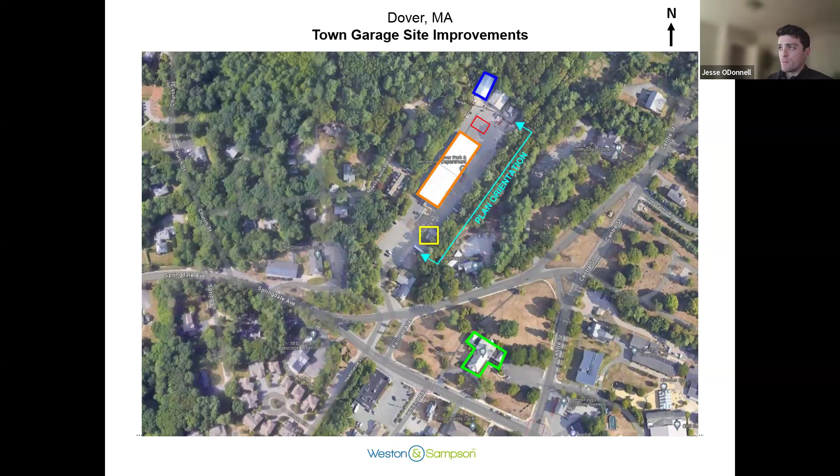I'll flip to the next screen here, so for everyone's reference, we're going to twist to accommodate that axis. Let's zoom into the rear portion of the site where the red rectangle is and see what the plan looks like. Here's the plan. We have the proposed location of the new fuel system indicated by the red, orange, and blue area on the plan.

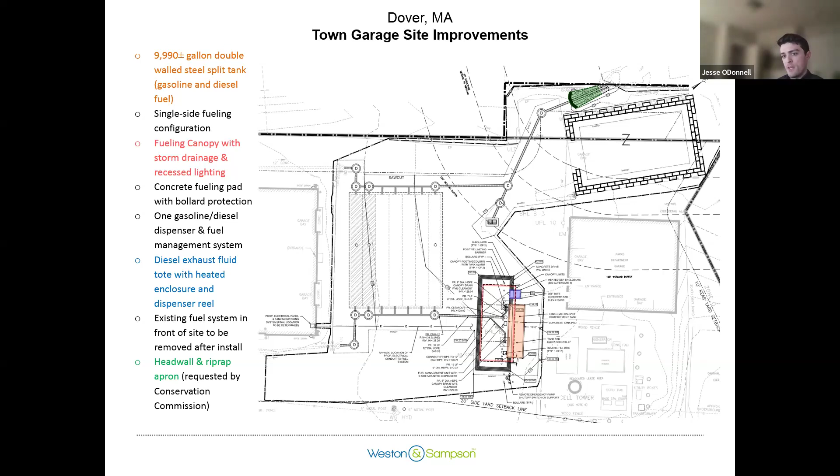In orange is the just under 10,000 gallon double-walled steel split tank. In red is the fueling canopy with associated stormwater piping to connect it to the proposed stormwater system on the site. In blue is the diesel exhaust fluid tote with a heated enclosure and a dispenser reel. We are proposing the existing fuel system in front of the site be removed after installation of the proposed system so there is continuity in service.

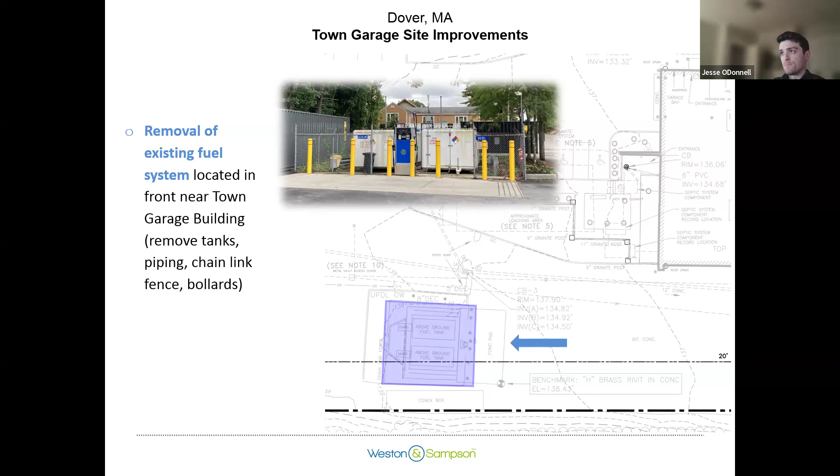With that, I'd like to jump into the siting assessment we underwent with the DPW a year to 2 years ago when we started investigating potential options for this project. The first siting option assessed was just replacing the current fuel system right in place, and for a number of reasons we deemed that unideal or inadequate. First, the current location of the existing fuel tanks requires reverse vehicular maneuvers to access them, whether reversing in or out, which presents at best an inconvenience, but at worst a safety risk and major fuel delivery challenges.

This is mentioned in memos we received from the fire and police chiefs, included with our application. The fire and police chiefs are present tonight and can help answer any questions the board or public may have. Second, this location would interrupt on-site fueling operations, adding cost associated with whatever temporary fueling solution would be found.

Lastly, a portion of the tanks are currently located within an AT&T easement, which prohibits structures, so that's an existing non-conforming condition. A portion of the tanks are also located within the property line structure setback, another existing non-conforming condition. By relocating the tanks outside of this area, we would restore conformity with both conditions. So with all that in mind, we set out to look for a new location for the tanks.

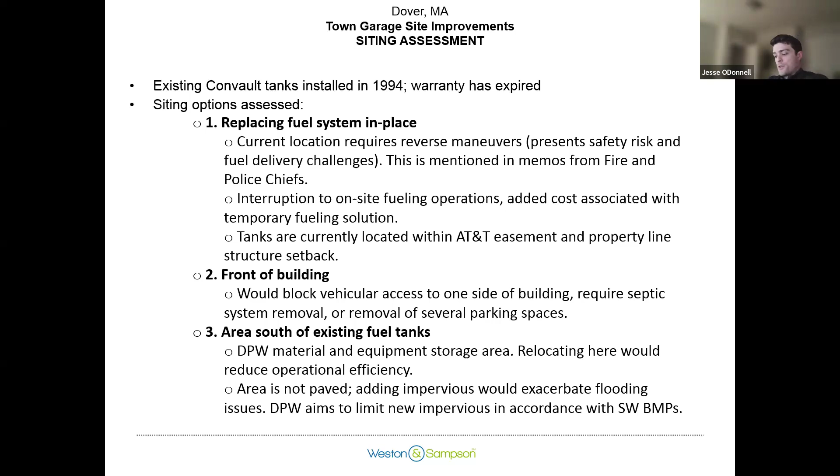Continuing with this location, another con was the 4% slope that exists here. It presents some pad installation and fuel operation challenges. Ideally, a pad would be installed on a slope that's closer to 2% or less. And lastly, this location would require additional geotechnical and environmental exploration, which would not be required in the rear portion of the site because those explorations have already happened. So locating it here would also require an extension in the timeline and additional explorations and costs.

So for all these reasons and the additional benefits I'm about to mention, we selected the rear of the site as the best location for the project.

The fuel tanks conform to zoning and dimensional requirements where they're currently proposed. We already incorporated the Conservation Commission's feedback to their satisfaction. Additionally, this is the best option for vehicular access and circulation, and we can have the police and fire chief speak more to that if needed.

The rear location keeps critical infrastructure away from a public-facing location. The grades in this area are more forgiving, not quite the 4% we saw out front, they are less steep. Lastly, the National Fire Protection Association requires tanks like this one to be offset 15 feet from other buildings and structures. The closest we have is about a 20+ foot offset to, I believe, the Parks and Rec garage, so we're in exceedance of that requirement as well.

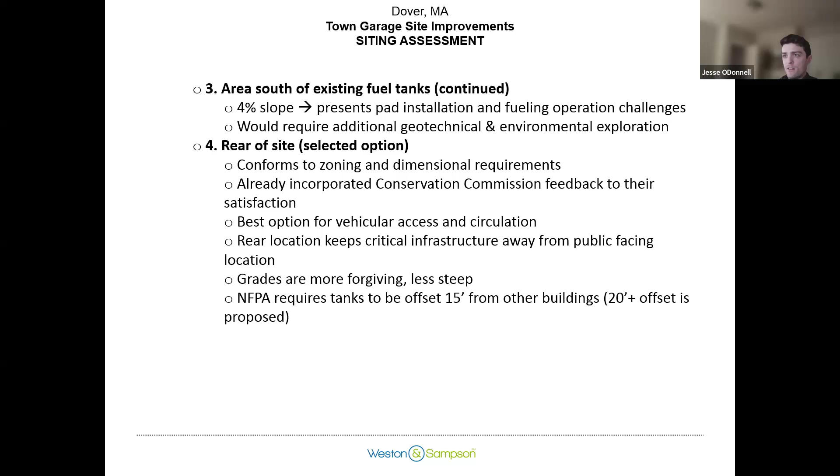So with that in mind, I'd like to pass this along to my colleague Tyler, who can talk a little bit about some of the safety measures associated with the tanks themselves.

Hi everybody, can you all hear me?

Sure can, Tyler. So I know Jesse went through some of the location discussion, but I know there's a lot of concern about the safety around the fuel island. I just wanted to highlight that safety is important to Weston and Sampson and the DPW. We wouldn't be proposing anything that we felt would endanger folks, either the abutters or the DPW personnel using the fuel island.

I just wanted to highlight some of the safety features that went into the design of the fuel island, starting off with the tank that we chose. This isn't your average tank, it's a very highly engineered tank that meets some of the strictest safety requirements in the country, meeting the UL 2085 rating.

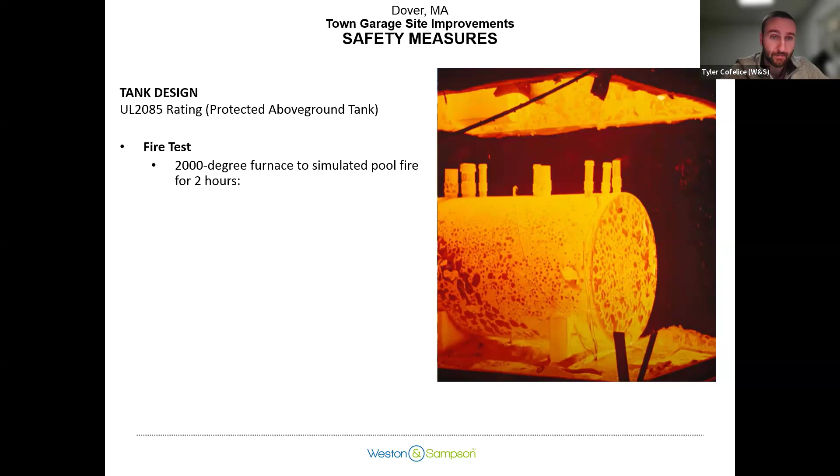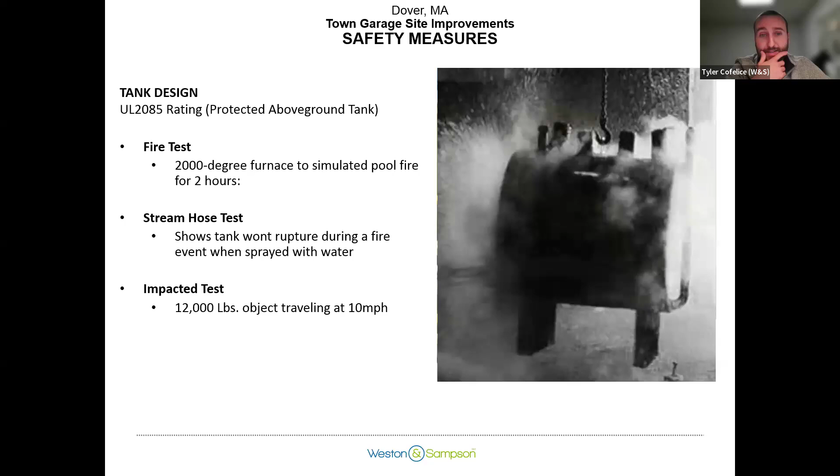Right after that test, they go through a stream test, where they blast the tank with cold water to show it won't rupture when being cooled off after a fire, preventing a release. The next test is an impact test, where you can see a 12,000-pound object being swung into the side of the tank, simulating a vehicular incident to show there would be no rupture to the inner tank. These tanks are considered protected above-ground tanks according to NFPA and meet the vehicular protection requirements all on their own without having bollards.

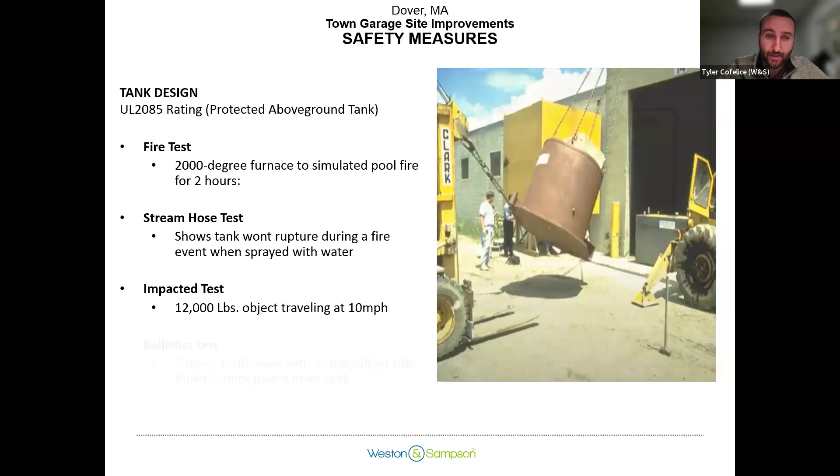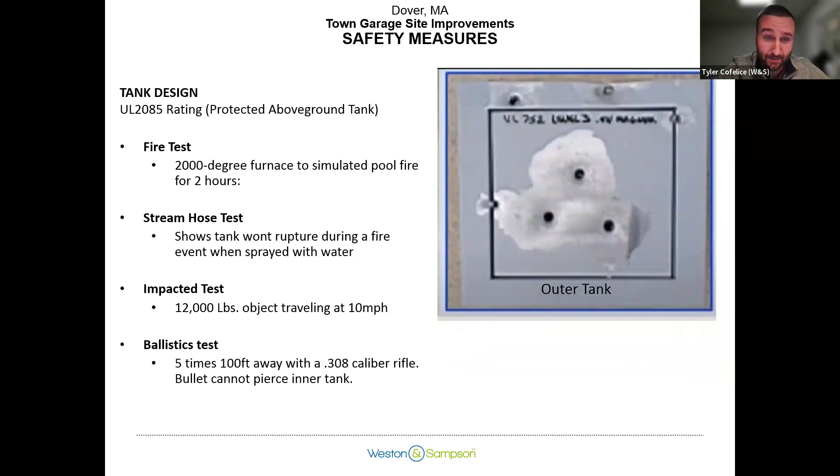We added 6-inch bollards around the tank to provide additional protection. In addition, the tanks have to be ballistic tested. They're shot 5 times from a .308 caliber rifle from 100 feet away, or 33 yards, give or take. You'll see 5 bullets on the outer tank, and it has to not be able to pierce the inner tank. That photo shows an example of what the outer tank would look like. So the tank itself is a very, very engineered safe tank.

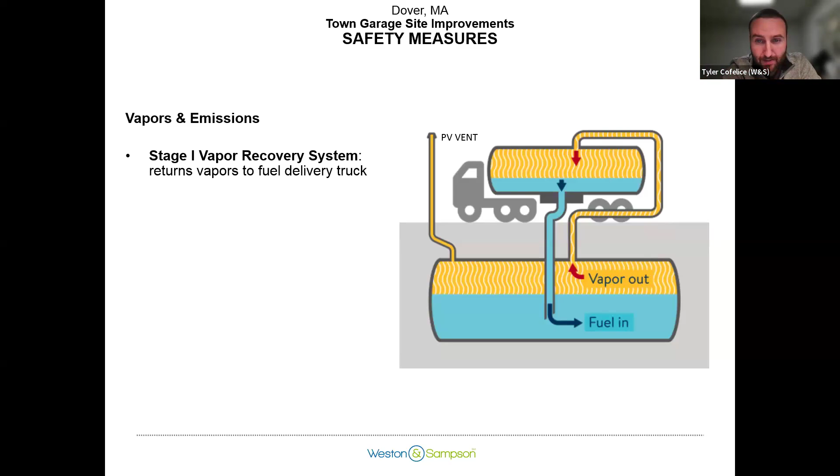The next part of the design I wanted to talk about is the vapors and emissions design built into the system. One of the first is called Stage 1 Vapor Recovery, used to meet National Clean Air Act requirements. Whenever a fuel delivery is brought to the system, a fuel truck pumps fluids into the tank, displacing vapors, and we have to add a pipe that displaces the vapors right back into the truck to prevent them from emitting out into the environment and moving off the property.

There's also a vent called a pressure vacuum vent. This is meant to shut the vent off at all times, except when the tank has to depressurize, like say it's really hot out and the tank gets heated up, the pressure has to be released. So it'll just let it depressurize a little bit and then close again.

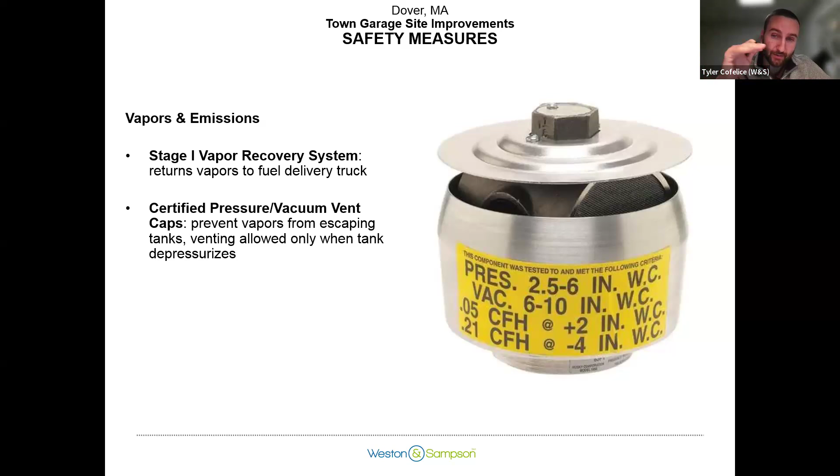The next feature that deals with vapors is an onboard refueling vapor recovery system, which has been designed in vehicles since 1998. This does a similar thing as the Stage 1 vapor recovery. When you're filling up your tank in your car, it forces the vapors to a canister that captures the vapors and prevents them from being released

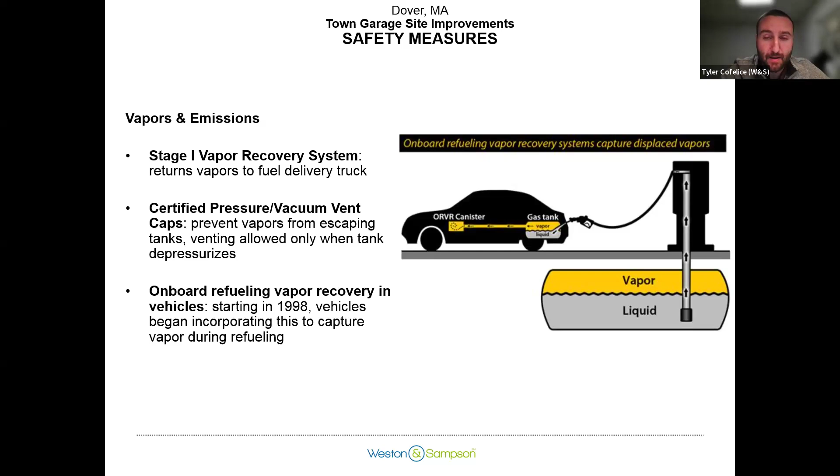Into the environment. These things aren't winning awards for being aesthetical masterpieces, but everything on them is meant for a reason, whether it's safety or function.

Just not to bore everyone, but these tanks are very, very strong. You can shoot them with a gun, you can light them on fire, you can hit them with a car and they won't leak. The only other way we can think of that it could potentially leak is just over time, sometimes water builds up in these tanks and they can corrode the inner tank, in which case they would leak.

They would leak into the interstitial space, which is continuously monitored by an electronic leak monitoring system. That will set off an alarm. It will also automatically notify personnel with emails of such an event.

We also have overfill prevention valves, which is a float in the fill that will, when the tank reaches 95% full, shut off the valve, preventing more fluid from going into the tank. There's also an audible visual alarm that goes off at 90% to notify the fuel tank delivery truck, as well as the DPW personnel present, that the tank needs to shut off the fill.

We also have inline detection, which means if the pump detects a scenario of pressure loss that's inconsistent with a delivery scenario, it will automatically shut it off. Every segment of the fuel piping line that can be shut off with valves has built-in pressure relief, so that if it's baking in the sun all day, the pipes can be depressurized by letting fluid back from the pipes into the tank, preventing a rupture.

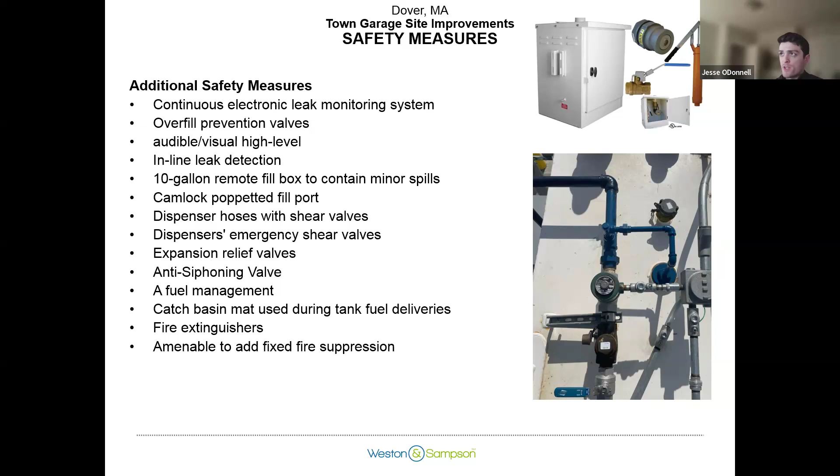That was very informative and I really appreciate the detail. Thank you. So I'm going to open this up first to planning board members for any questions and comments they may have for Jesse or Tyler, and then I will open it up to the resident attendees. So Jody or George, do you have any questions for Tyler or Jesse? I have no questions, but I really want to say thank you for that presentation because that was extremely helpful.

Yeah, I agree. I thought that was helpful given the conversations that have happened here over the course of this process.

Just as a bit of an addendum, I'm sure you may not have this in front of you, but I'm curious if you have any information or data on any incidents relating to these tanks in the last several years. Do you have anything like that you could share?

I don't have any statistics off the top of my head. I've been working with Weston & Sampson for 10 years installing similar fuel islands, and I've personally not heard of any issues from the fuel islands I've worked on, and I've done a lot of them. Okay, thank you.

Okay, as I mentioned in my opening remarks, we'll now open it up for any new information or content. Nicole, are you here this evening? Is Nicole Safarian here? I think so. It just says Nicole, but I think that's her.

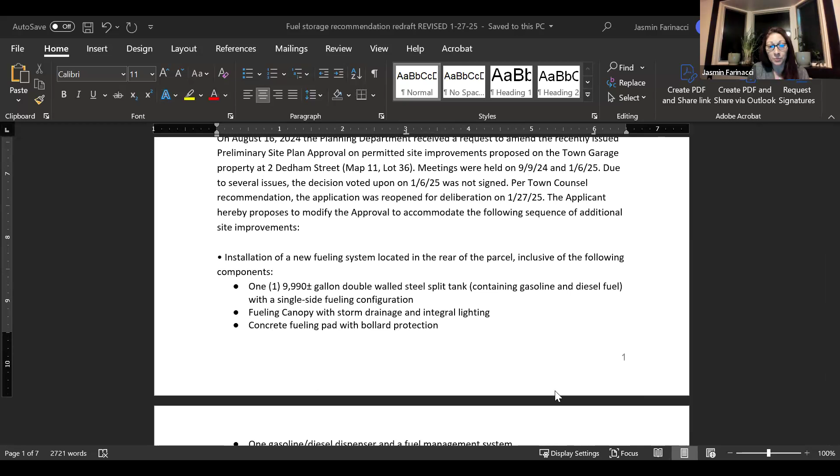To review, it was an installation of a new fuel system located in the rear of the parcel with one 9,990 gallon double wall steel split tank, a fueling canopy, concrete fueling pad, a single gasoline diesel dispenser, a diesel exhaust fluid tote with heated enclosure, and other miscellaneous components to support the fuel island, along with removal of the existing fuel system located proximate to the town entrance. The new fuel system would allow for the removal of the aging double-walled Convault fuel tanks, which were installed in 1994. Their 30-year warranty would be expiring in 2024, or did expire in 2024.

The proposed location for the new fuel island is depicted on the plans by Weston and Sampson, revised through October 21st, 2024. This location was selected to promote more efficient fueling operation for town vehicles. The position of the existing fuel system frequently requires vehicles to reverse before or after fueling and makes fuel delivery challenging. Additional improvements enabled by the new fuel system include a proposed canopy with under-canopy motion sensor lighting. The new fuel system would be classified as a fleet vehicle motor fuel dispensing facility.

Therefore, fire suppression for the fuel island is not required by the Massachusetts Code, as confirmed by Ed Cornack of the fire department. The proposed modifications are located outside of the 100-foot buffer zone to the nearby isolated wetland, which was delineated by Weston and Sampson on October 12, 2023, and is not within the Conservation Commission's jurisdiction. The proposed modifications result in no net increase in impervious surface on the site.

Pursuant to section 18540C of the Dover zoning bylaws, no application for a building permit shall be made for any structure in the open space district until site plans have been submitted to the Board of Selectmen for review, comments, and recommendations. Therefore, approval from the Board of Selectmen will also be required. The Board of Health, Town Engineer, and Building Department do not have requirements for this amendment. The Fire Department requires a permit for the tank's final disposal site when removed, and the name of the contractor handling the disposal. The proposed work is not expected to create any increase in pedestrian, bicycle, or vehicular traffic to or from the site.

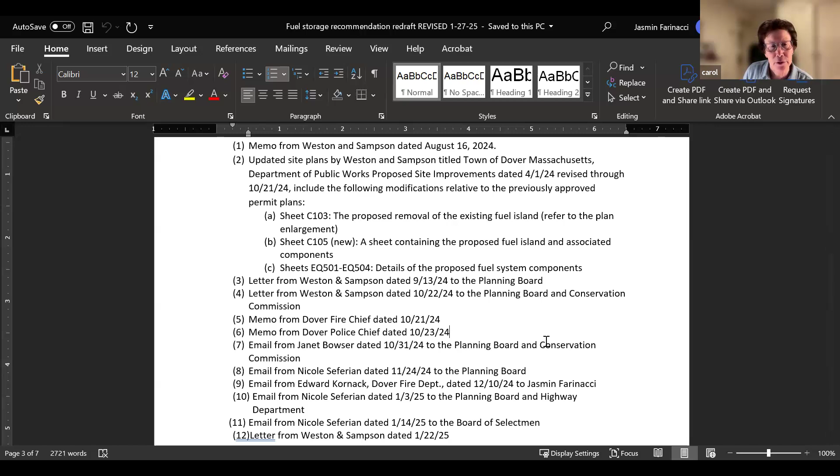So we did break this down. I think this was the first one we did this way, Carol, with the findings that included more of the conversation as well. So we are going to go through the findings of site plan review, and then we're going to go over the findings that were made based on comments that were presented for the project.

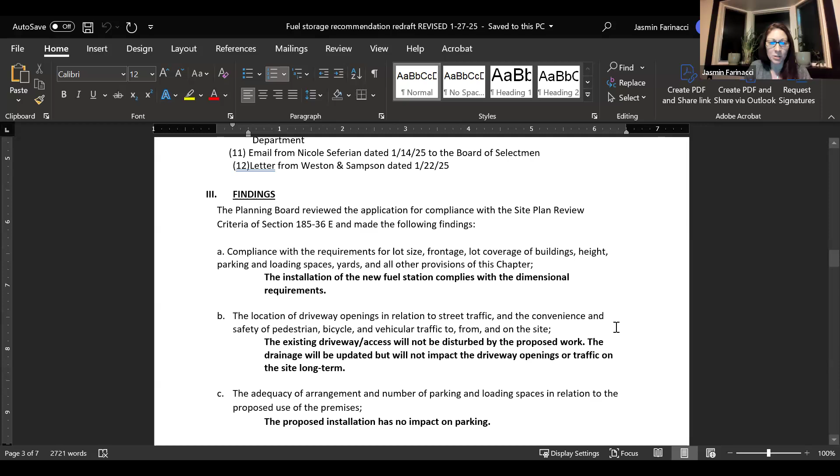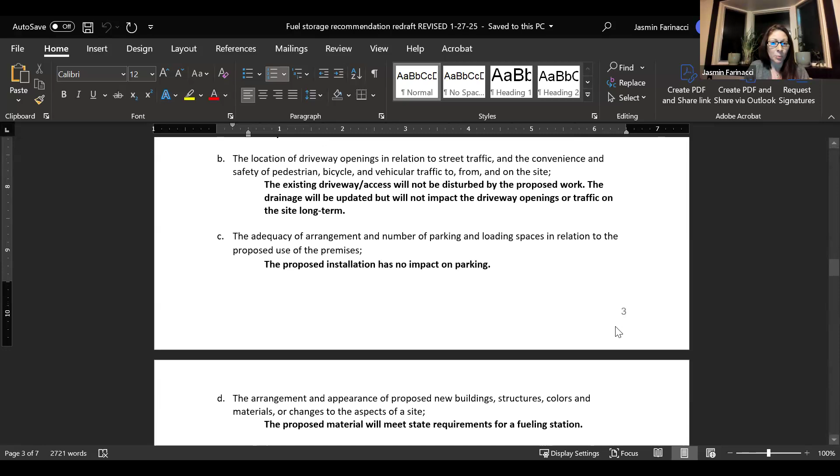So these findings are based under site plan review, compliance with the requirements for lot size. The installation of the new fuel station complies with all dimensional requirements. The existing driveway access is not proposed to be disturbed by the work. The drainage on site will be updated but will not impact the driveway openings or traffic on the site long term. The proposed installation has no impact on parking. The proposed material will meet state requirements for a fueling station.

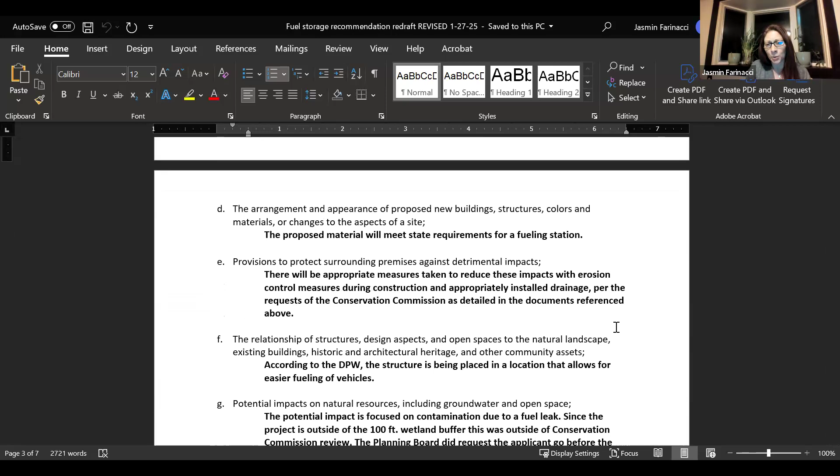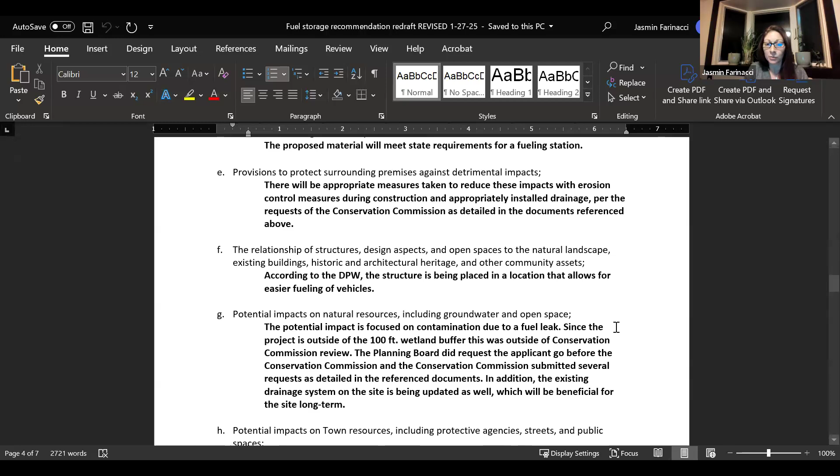There will be appropriate measures taken to reduce detrimental impacts around the surrounding premises with erosion control measures during construction and appropriately installed drainage per the request of the Conservation Commission as detailed in the documents referenced above. According to the DPW, the structure is being placed in a location that allows for easier fueling for vehicles. The potential impact focused on contamination due to a potential fuel leak.

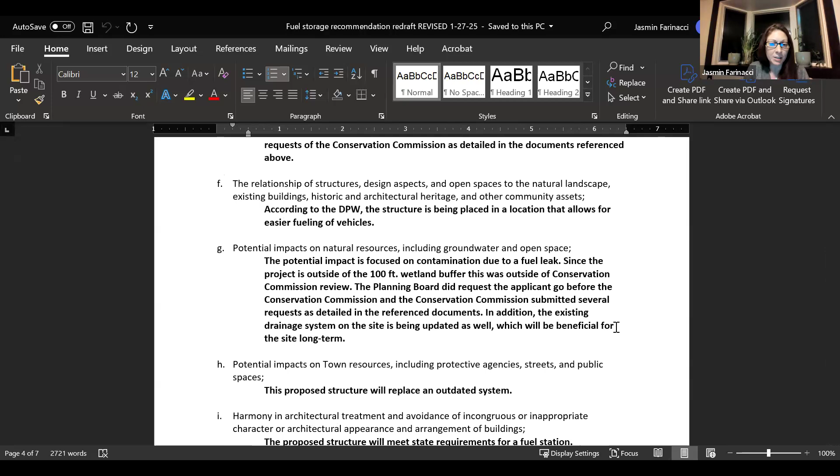Since the project is outside of the 100-foot buffer zone for the Conservation Commission review, the Planning Board did request the applicant go before the Conservation Commission. The Conservation Commission submitted several requests as detailed in the reference documents. In addition, the existing drainage system on site is being updated as well, which will be beneficial for the site long term. The proposed structure will replace an outdated system. The proposed structure will meet state requirements for a fuel station, and the application complies with requirements of the zoning bylaw.

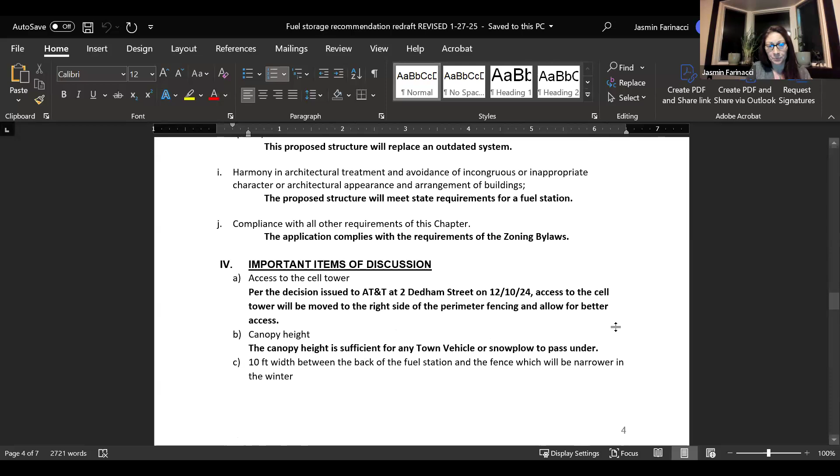So this important item of discussion: per the decision issued to AT&T at 2 Dedham Street on December 10th, 2024, access to the cell tower will be moved to the right side of perimeter fencing to allow for better access, so it won't disrupt the fueling station should it be placed there. The canopy height is sufficient for any town vehicle or snowplow to pass under. The DPW will keep the 10-foot, or now 12-foot, area clean of snow debris for access. It was noted by the AT&T applicant that the fencing would be parallel to the new fuel storage area.

That fencing had been damaged previously. The Planning Board expressed concerns about this and reviewed it with the DPW, whether just leaving it unplowed is safer than piling up snow on both sides of the narrow area. Weston and Sampson provided a new site plan with a 12-foot wide lane. The lack of fire suppression, although not required by law due to non-commercial use, is a concern. There is a recommendation in the conditions that addresses this.

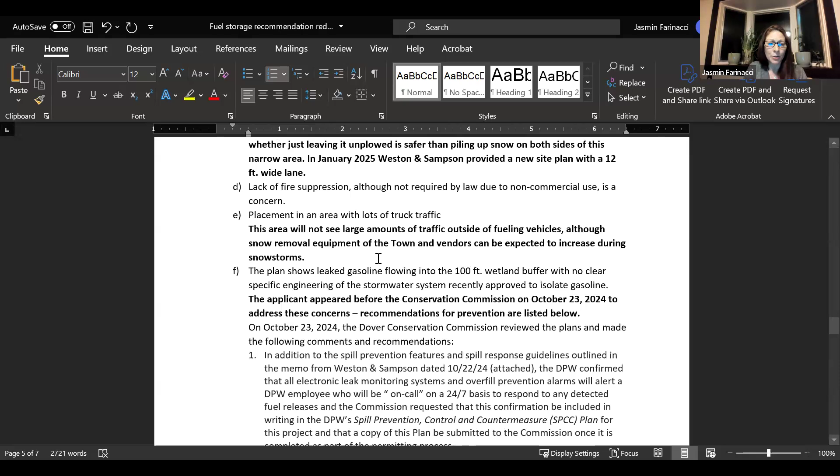Placement in an area with lots of truck traffic. This area will not see large amounts of traffic outside of fueling vehicles, although snow removal equipment of the town and vendors can be expected to increase during snowstorms.

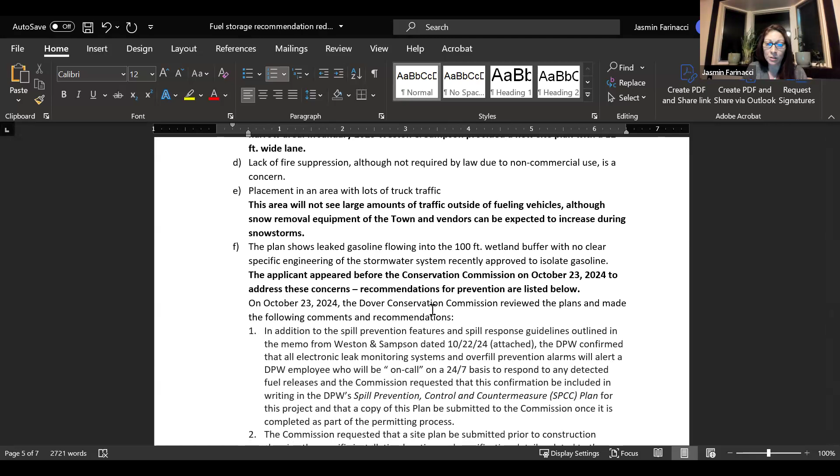And for potential leaks out into the 100-foot wetland buffer, the applicant did appear before the Conservation Commission on October 23rd, 2024 to address those concerns, and the Conservation Commission made the following recommendations for prevention.

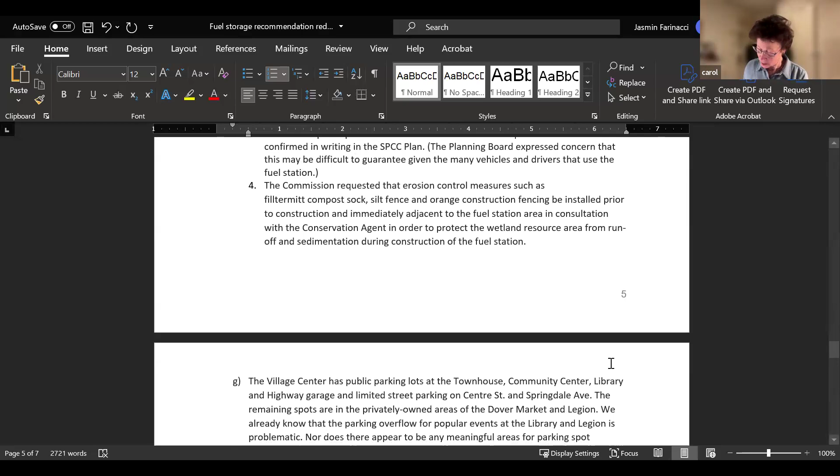So the Village Center has public parking lots at the Townhouse, Community Center, Library, and Highway Garage, and limited street parking on Centre Street and Springdale Ave. The remaining spots are in the privately owned areas of Dover Market and the Legion. We already know that the parking overflow for popular events at the Library and Legion is problematic. There does not appear to be any meaningful areas for parking expansion.

With the revitalization of the community center and the work on the Village Center revisioning project, the removal of additional spots at the highway garage, should the fuel station be located in the front of the building, may limit the flexibility and ability to add needed spots and impact further revitalization of the town center.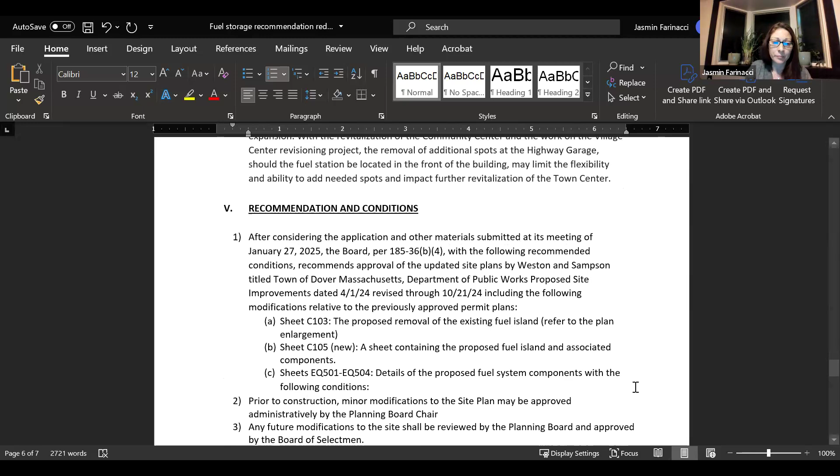Okay, so before we get into the recommendations, as Jasmin mentioned, this is a new section we've just recently put in, the findings section, because we wanted to make sure that the recommendations or decisions we make during our site plan review process are detailed enough so that all the other boards, committees, and staff members that need to opine on this, whether it's Board of Health, the town engineer, the building inspector, or in this case, the Board of Selectmen, have context in which to view our recommendations. Now we have Zoom meetings because of COVID, but before that it was only these kind of recommendations and the minutes, which tend to be even briefer, that would provide the overall context of a discussion. So I hope that this lengthy list of findings is helpful to you all, and helpful for all the town officials continuing to review this project.

So now we can go on to the recommendations. After considering the application and other materials submitted at its meeting of January 27th, 2025, the board per 185-36B4, with the following recommended conditions, recommends approval of the updated site plans. Is that what we're recommending, Carol? Yep. Of the updated site plans by Weston and Sampson titled Town of Dover, Massachusetts Department of Public Works, with the sheets detailed.

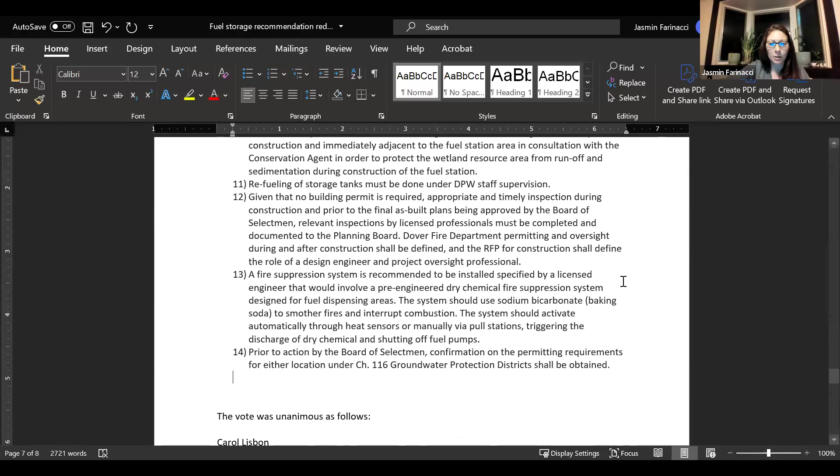However, I would like to make the following recommendation added to section 5. So this would be section 5, number 15. No, 5, back at the end. There we go. Okay, and we'll have Jasmin type as I speak.

Although construction bylaw chapter 93 does exempt municipal projects, we recommend that construction hours adhere to the bylaw, and that notice of construction schedule be conveyed to abutters.

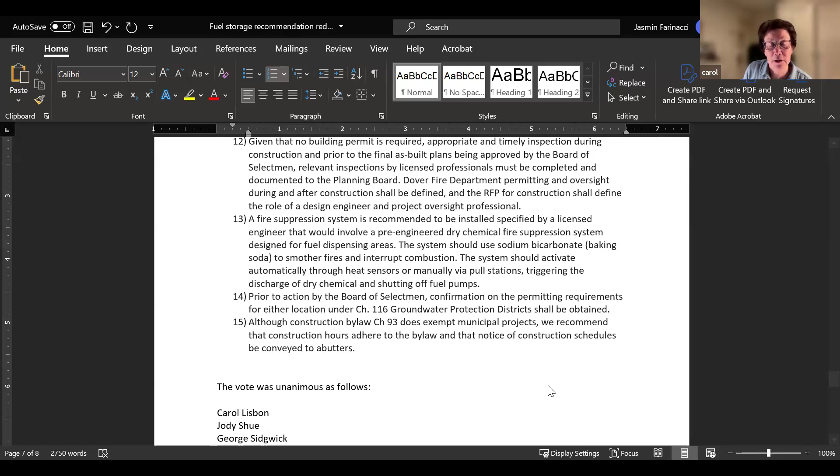Nicole, this specifically addresses two of your points, not only from your conversations over the last couple of weeks, but also your two major points from your 2023 comments on other activity being done at the highway garage site. George and Jody, given what you've heard tonight from the abutters as well as from Weston and Sampson, are there any other recommendations you would like to add? I might suggest we address the issue of a traffic study having not been completed, and if that is the case, recommend that one be completed as part of this process.

So this is a traffic study internal to the site.

Do you have some wording you'd like to suggest? Prior to action by the Board of Selectmen, the Planning Board recommends that a traffic study analyzing traffic flows to the existing site in comparison to the proposed site be conducted to surface clarity on traffic patterns on the town garage site. Hold on, can we back that up a little bit? Probably not great English. No, it's okay. So, in comparison with the proposed site. I think that's basically it.

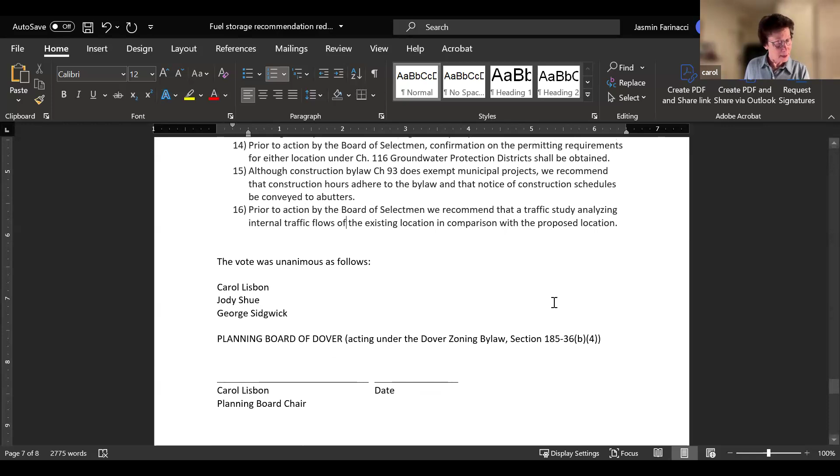So I am not going to read the entire recommendations again. If this was a normal site plan review and it was our decision, we would do it for the record, but we have this on Zoom. We will be posting this document on the website tomorrow. And of course, I'm sure it will come up when the site plan review agenda item occurs on the Board of Selectmen meeting, whenever that is. The public, of course, will be able to participate in that too.

So I'm going to make a motion to approve the preliminary site plan review recommendation discussed this evening on January 27th, as amended during the meeting. Do I hear a second? Second. I will now take a vote. George? Yes. Jody? Yes. Carol? Yes. So with that, this recommendation and our thoughts and comments will go up to the Board of Selectmen's office, and I ask that all the attendees here keep apprised of the Board of Selectmen's activities on this, to make sure you're aware of when the Board of Selectmen will be putting this on their agenda.

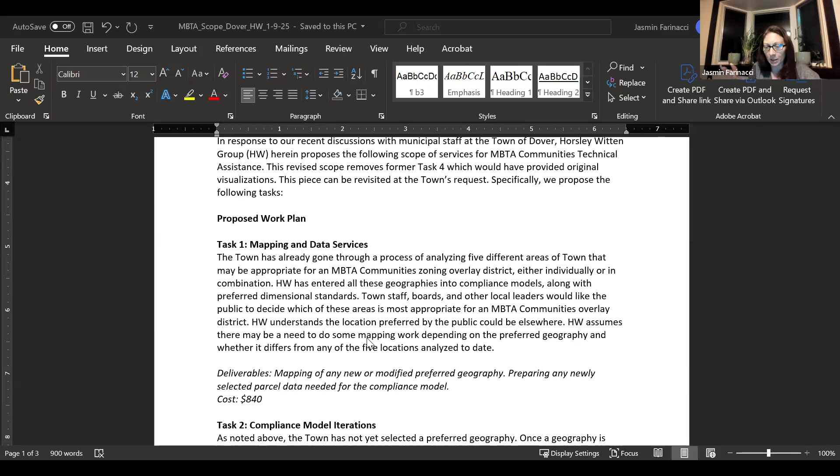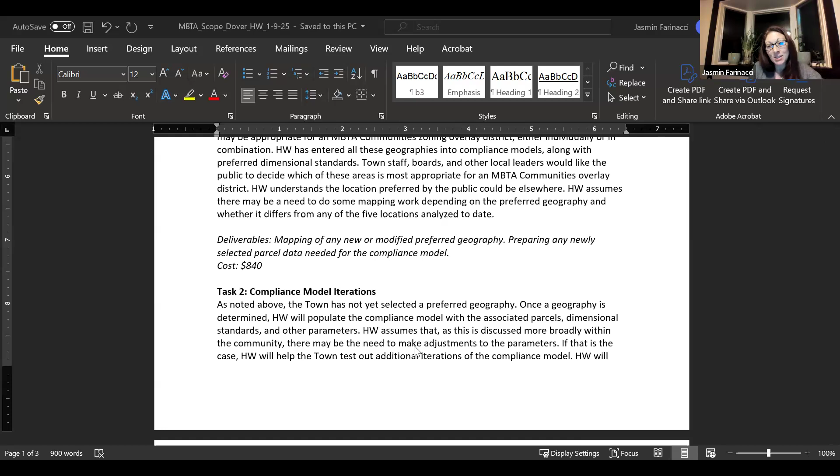So we said, is there anything that you can do for us that's a little more budget friendly, considering that you've done so much work for us already? So Jeff went through and said that we could do task 1, which is the mapping and data services, essentially just helping us create our overlays, wherever those might be, and how that's going to fit into the future GIS system, so that we're not making those shape files by ourselves. The compliance model iterations, it is nice to have Horsley Witten for. The town does have staff trained to use these compliance models, so we don't necessarily have to use Horsley Witten time for that, but that is something we've included in the scope.

Public engagement informational sessions, so we would like to have Jeff Davis available for 2 public information sessions with us, reviewing what MBTA is and reviewing overlay zones, public input, survey data, things of that nature. And then task 5, zoning overlay text amendments, was recommended as well. He's already drafted the MBTA communities draft bylaw.

This would be simple adjustments based on public feedback. More extensive requests would require another contract amendment. So if we completely threw it in the bin and said we need to start from scratch, that would be different, but if we're just changing things like proposed zoning districts, that language isn't even in there yet, so that's fine. That wouldn't be that impactful.

And then public hearing assistance, that would be if we wanted him to attend our public hearings in August and September, prior to the special town meeting. We said that wasn't entirely necessary, potentially. So he had said he can do 1, mapping data services; 2, compliance model iterations; 3, public engagement; 5, zoning overlay; and 6, public hearing assistance, for under 10,000, which is good because we don't have to go out for bid if it's under 10,000.